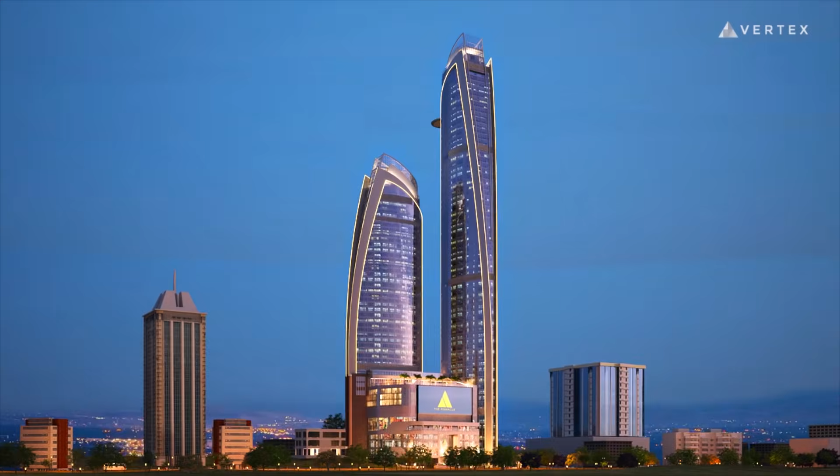In 2017, Kenya's president stood on a plot of land in Upper Hill and laid the foundation stone for what was supposed to become the tallest building in Africa: 320 meters, 70 floors, a 5-star Hilton on top.

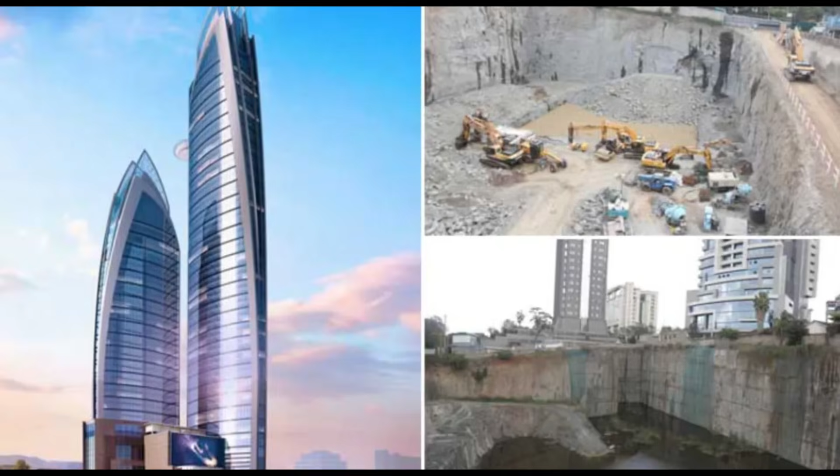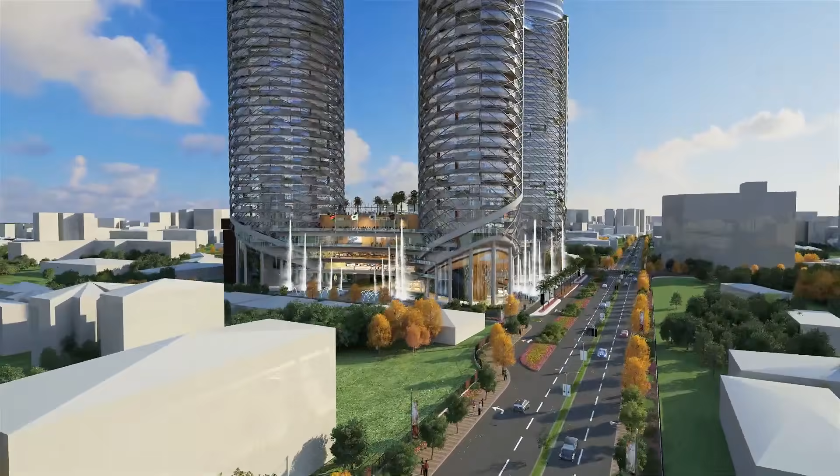Today, that plot doesn't have a tower on it. It had its land put up for auction. And it's not the only one. Kenya has announced at least 4 other skyscrapers just as ambitious, and every single one of them has stalled. This isn't a story about bad luck, it's a story about a pattern. And by the end of this video, there's one more tower, one actually under construction right now, that might finally break it.

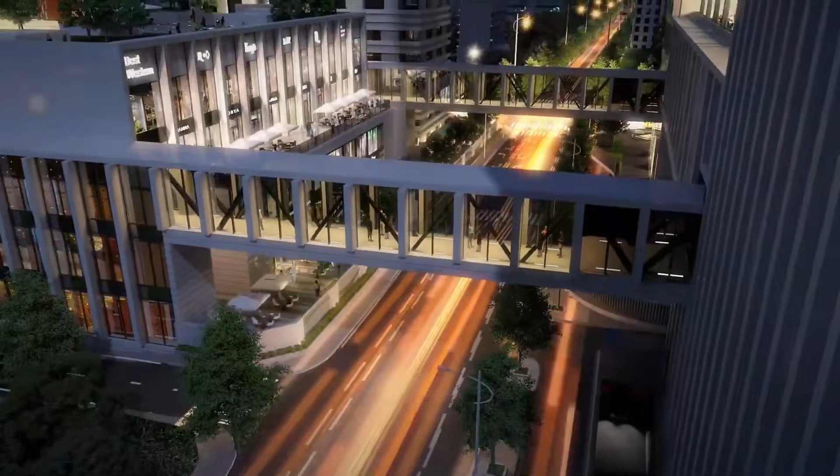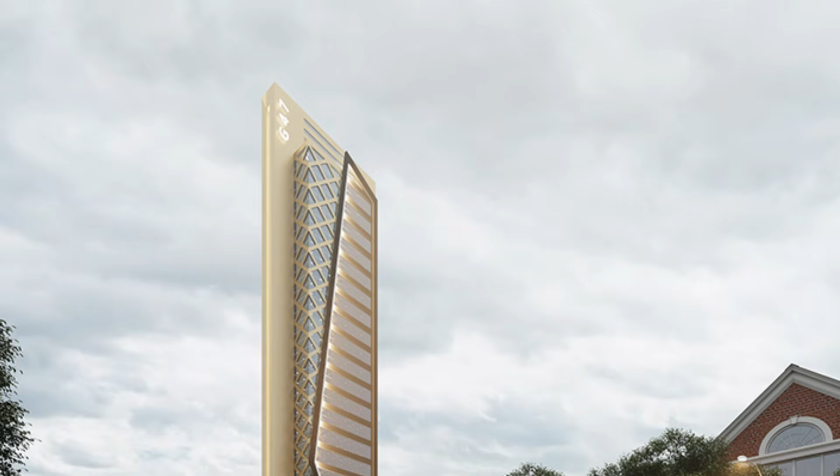Kenya doesn't have a shortage of ambitious skyscraper designs. Investors keep announcing them, presidents keep breaking ground on them, and renders keep circulating online. The hard part isn't dreaming these towers up, it's finishing them. Over the next 15 minutes, we are counting down 5 Kenyan skyscrapers that were announced with real money, real government backing, and real construction crews, starting with the quietest failure and building up to the one that has started with the most fanfare of all.

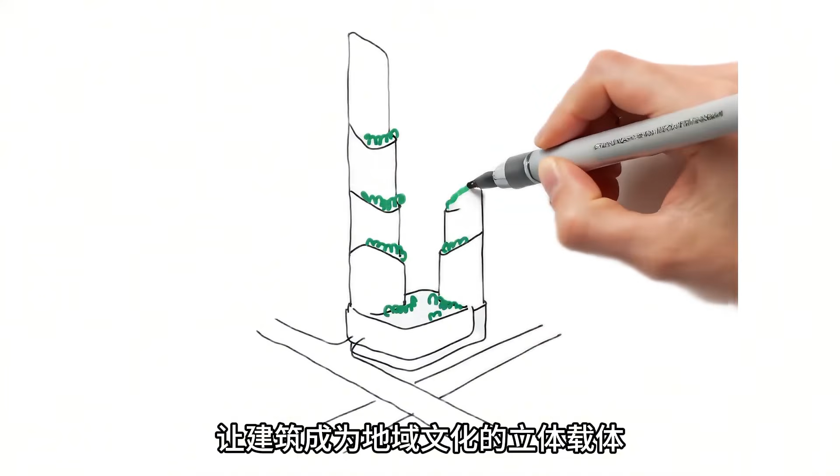And then, at the end, we look at a 6th tower that's currently under construction, one that Kenya's own pension fund says was designed specifically to avoid repeating this exact history.

Let's start at number 5: Montave Tower, another Upper Hill project announced around 2016. A 40-story mixed-use development, a joint venture involving Hass Consult and Abacus International, budgeted at roughly 5.56 billion shillings. Construction was expected to start in 2017. Nearly a decade later, Montave still isn't standing.

Property tracking data and local reporting describe the site as largely neglected, with minimal to no active structural progress since those early groundworks. It's not tied up in a dramatic court case, and it was not rejected outright by a regulator. It simply sat there year after year, quietly going nowhere, in a way that makes it the quietest version of this story. Not a collapse, not a scandal, just a stall that never really ended.

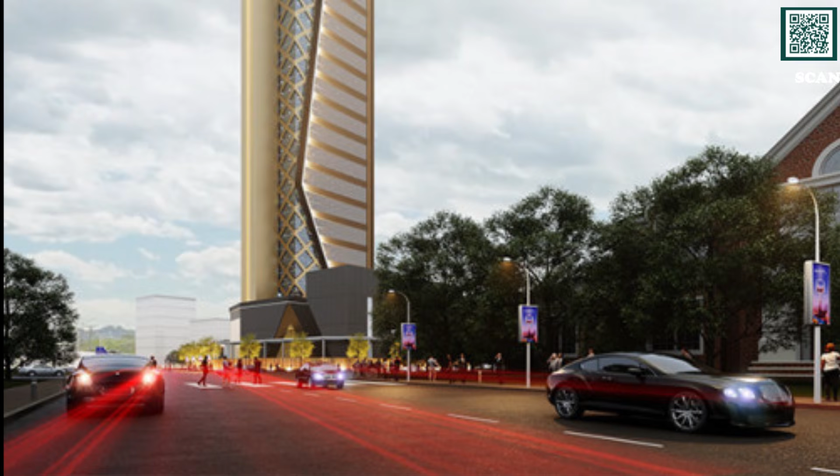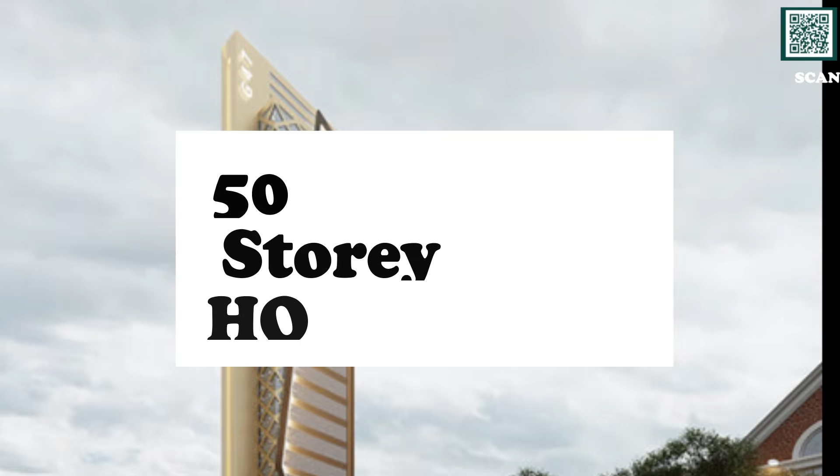Number 4 didn't die, it just got a lot smaller. G47 Ugatuzi Tower was announced as a 50-story headquarters for Kenya's Council of Governors, including a National Devolution Conference Center. Ground broke in December 2020 with then President Uhuru Kenyatta and Deputy President William Ruto both present. Budget around 5 billion shillings.

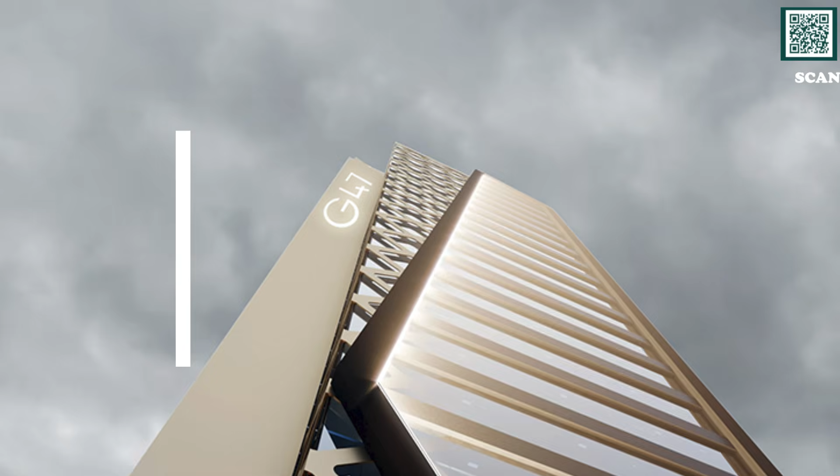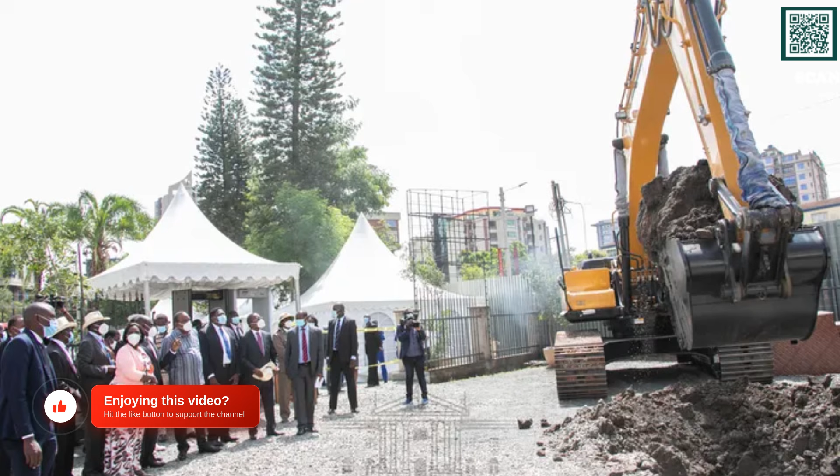But the funding source became controversial almost immediately. The project was being financed through a county workers' pension fund, LAPTRUST, and the county pension fund. And the workers' own union went to court, arguing they hadn't been properly consulted before their pension money was committed to a skyscraper. That case is a matter of public record through Kenya's own court system.

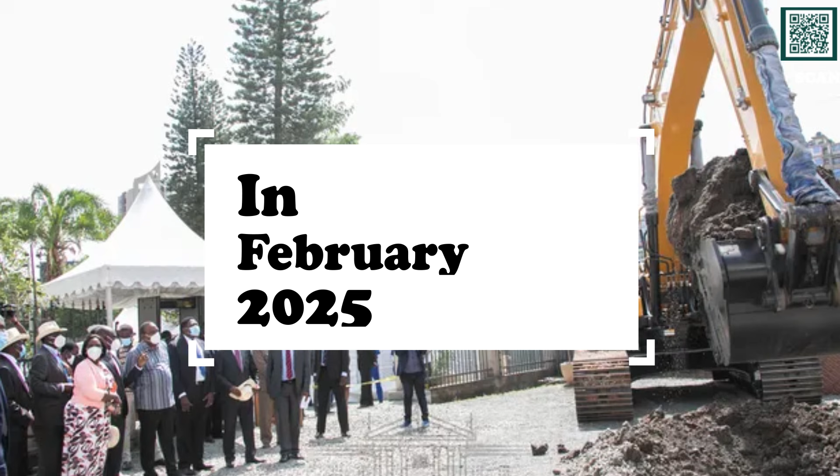In February 2025, Construction Kenya reported that the tower had been formally scaled back from 40 floors to 34. The official reason given was an oversupply of office space in Nairobi and rising construction costs. But industry reporting also suggested that pressure from the pension fund controversy played a role.

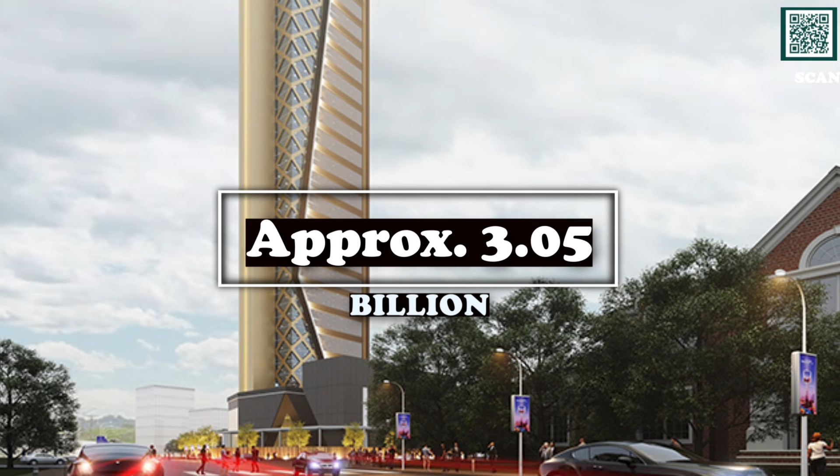And this isn't just a claim from a news article. There's an actual environmental impact assessment filed with NEMA for the revised 34-floor version of the building at a new estimated cost of about 3.05 billion shillings. That's a real, documented 15% size reduction on a project that already broke ground with two of Kenya's most senior politicians standing on site.

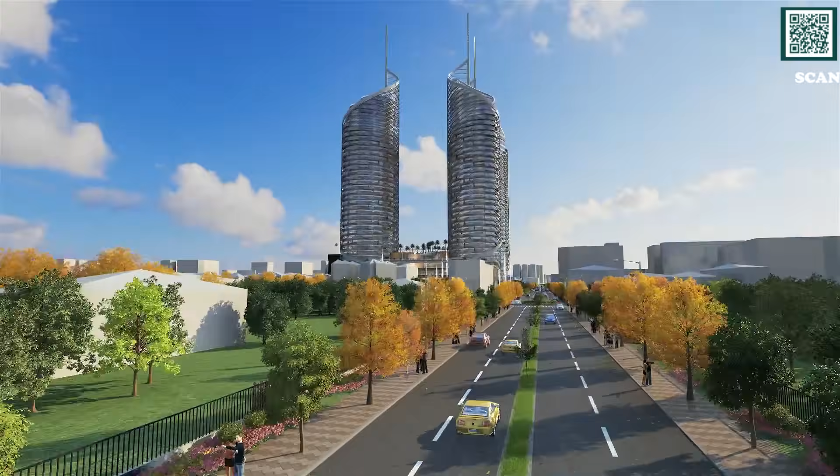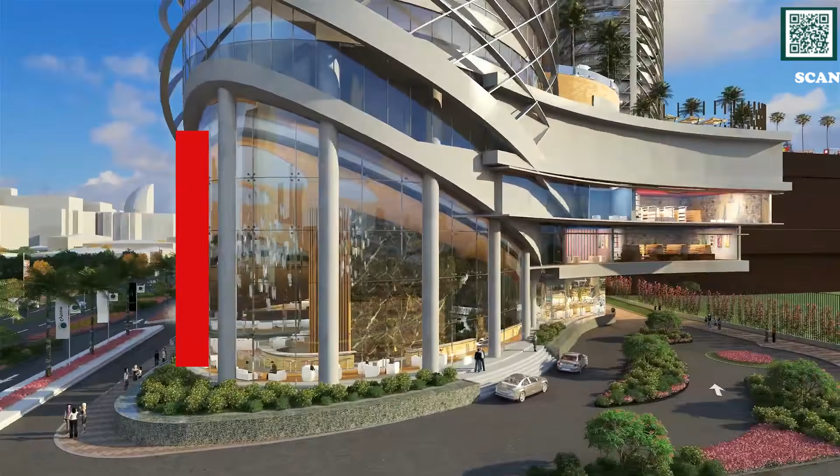Number 3 has a genuinely clean ending, which makes it a useful contrast to the two we have just covered. Cytonn Towers, 2 35-story buildings in Kilimani, 20 billion shillings, aimed at upper middle class residents, NGOs and diplomatic tenants. Nairobi City County approved the plan in July 2017.

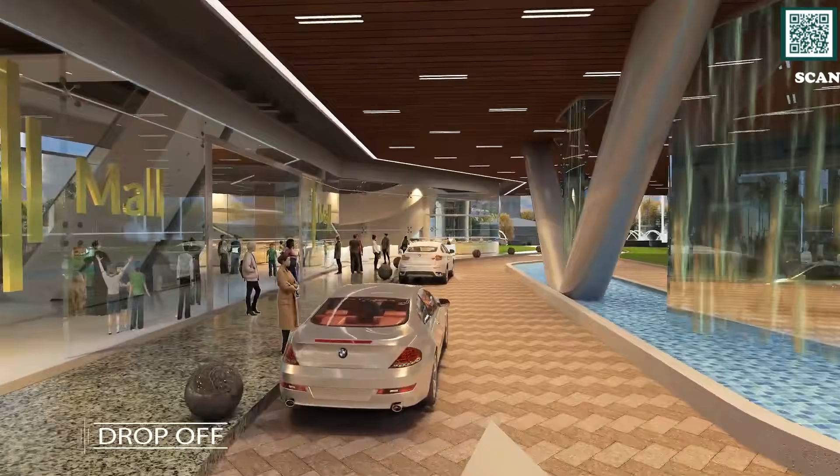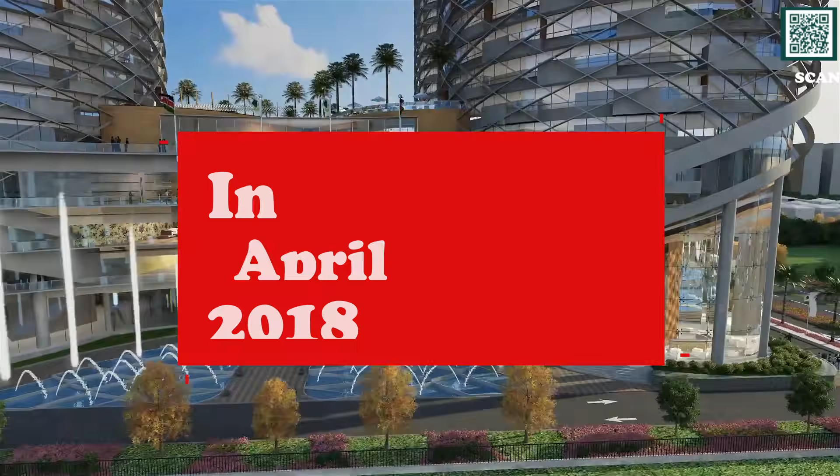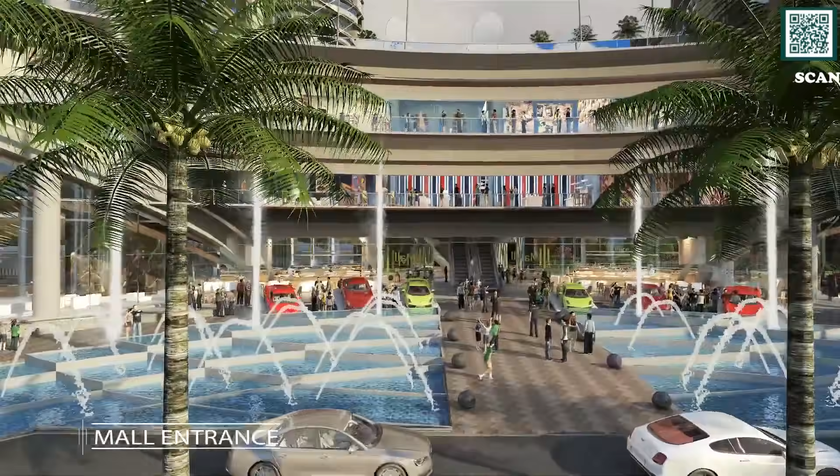Kilimani residents pushed back almost immediately. Traffic density and proximity to a nearby school were the main objections. And in April 2018, Nairobi County did something unusual: it cancelled its own prior approval. Cytonn sued to get that decision overturned. They lost. A High Court judge upheld the county's right to revoke an approval they had already granted, a ruling that's since been referenced as a precedent in other Kenyan development disputes.

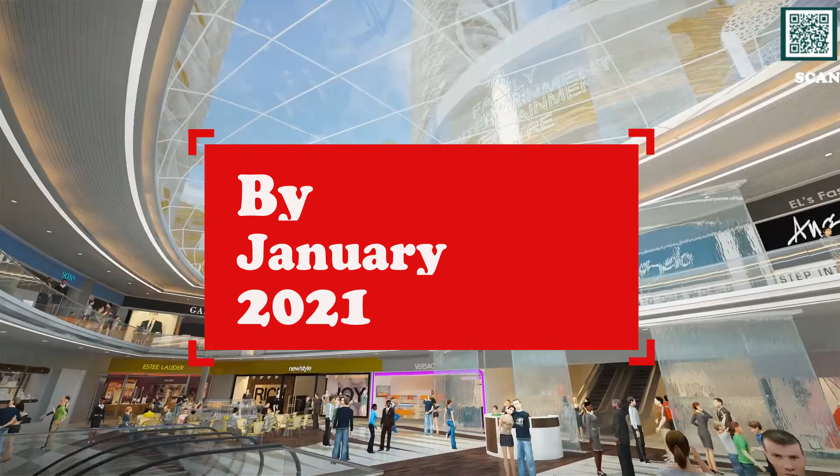By January 2021, Construction Kenya reported that Cytonn had shelved the project entirely and put the 4-acre plot up for sale, looking to raise around 2 billion shillings. Announcement, approval, opposition, cancellation, court challenge, defeat, and land sale. Of every project in this video, Cytonn Towers is the one we can say with full confidence is not coming back.

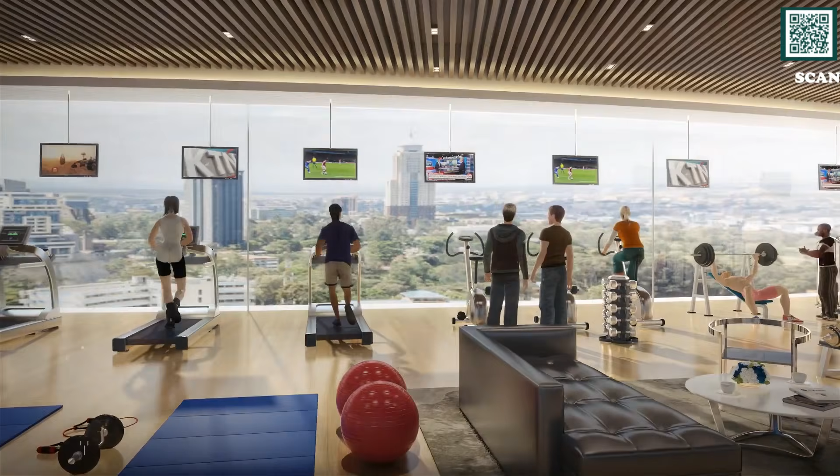Number 2 might be the most ambitious skyscraper ever proposed in Kenya, and is not even in Nairobi. Palm Exotica, proposed for the small coastal town of Watamu in Kilifi County, not Nairobi or Mombasa. 61 floors, 370 meters, a 5-star hotel with 270 rooms, a shopping mall, offices, apartments, even a casino.

Designed by Italian architect Lorenzo Pagnin, backed by Italian investor Franco Rosso alongside partners from New York and South Africa. Announced in 2018. In 2019, local leaders and residents publicly backed the project while Kenya's environmental regulator NEMA was still reviewing it. But here is the part most online write-ups about this tower leave out.

In January 2020, NEMA declined to issue the environmental license for the project as it was designed. Kenyan reporting at the time said NEMA cited concerns about zoning, physical planning, and the coastal foreshore, and told the developers to either redesign the project or find an alternative site entirely.

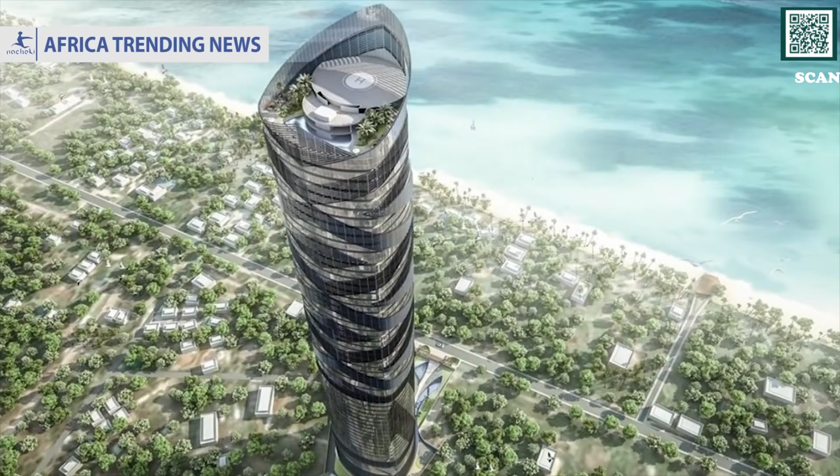Unlike Cytonn's court battle, this wasn't a community fight or a legal dispute. This was Kenya's own environmental authority looking at a super tall skyscraper on a sensitive stretch of coastline and saying, 'Not like this.' As of the most recent reporting available, the project is still described as being in limbo.

There is even an academic paper from 2022 examining the environmental and social impact assessment. So this wasn't just an internet rumor, it was a real proposal that went through real regulatory review and got turned away. 8 years after it was announced, Watamu's skyline is exactly as it was before anyone had heard the name Palm Exotica.

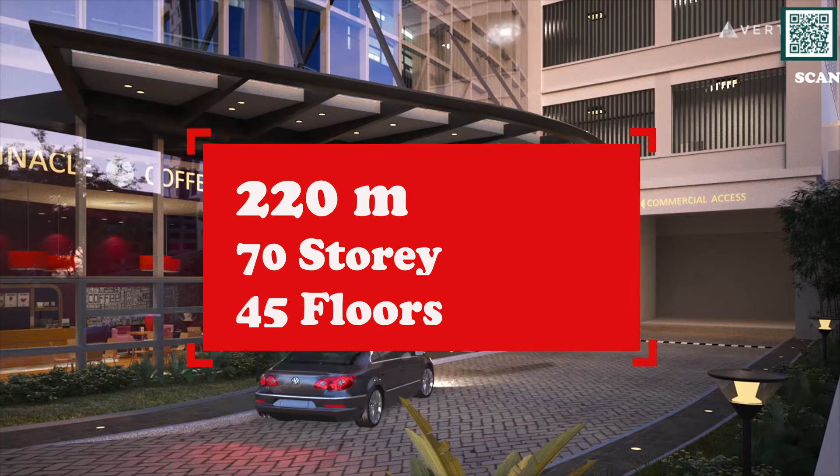And that brings us to number 1, the story that opened this video. The Pinnacle, sometimes called Pinnacle Towers, 2 adjacent buildings in Upper Hill, a 220-meter, 70-story tower, paired with a shorter 45-floor sister tower that was going to house a 255-room Hilton Hotel.

On May 23, 2017, President Uhuru Kenyatta laid the foundation stone himself. This wasn't a quiet private development. It was a national statement.

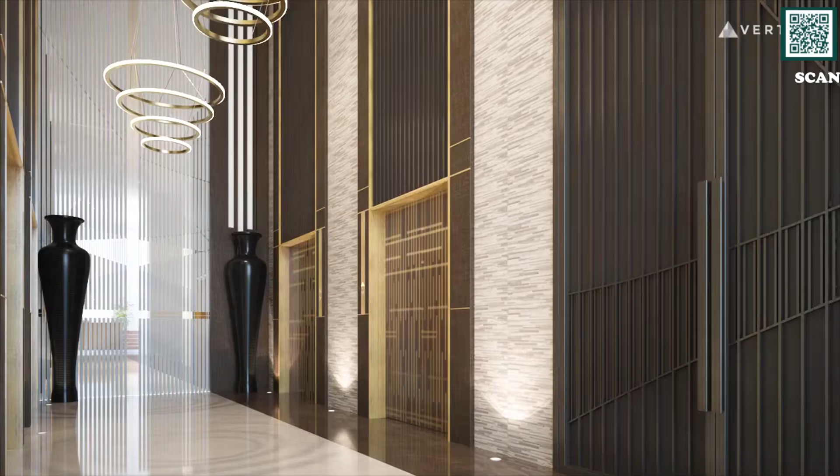The developers were Hass Petroleum and the White Lotus Group, led by Indian businessman Vijay Kumar Naidu. Construction actually started. For a while, this looked real. Then the legal problems started.

Part of the land the project needed became entangled in a dispute involving a Ugandan businessman and a trust connected to the family of a former UAE ruler.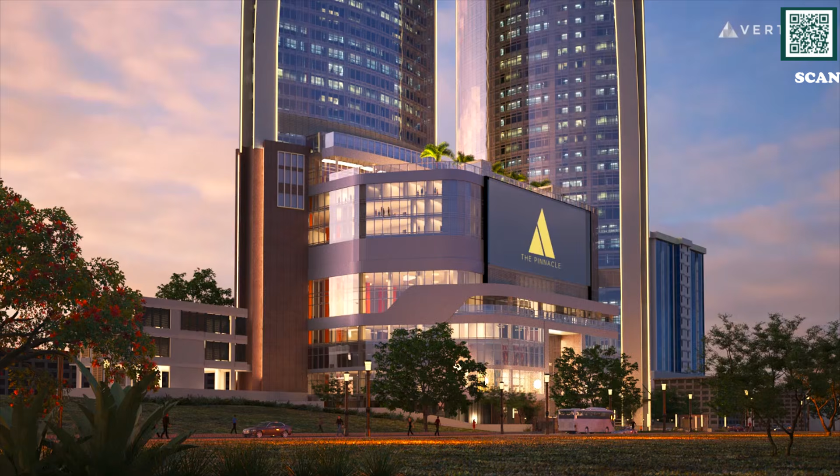In January 2021, a Kenyan court ordered the developer, White Lotus Projects, to pay a scaffolding supplier roughly 197 million shillings over unpaid debts. By 2024, Business Daily was reporting that the company behind the project, Jabavu Village, was facing multiple lawsuits over debts and contractual disputes tied to the site.

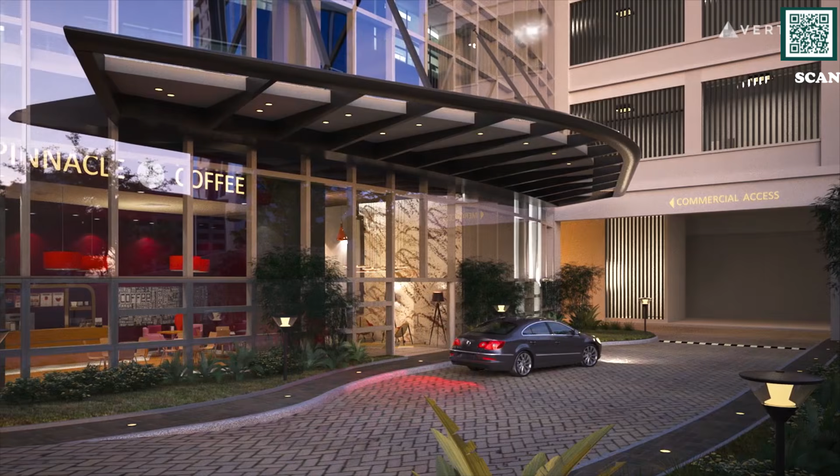Then in February 2025, the land itself, the plot the tower was supposed to sit on, was put up for public auction as part of a roughly 1.2 billion shillings loan dispute with the bank. There was also a court injunction filed around the same auction attempt, so even the sale itself became contested.

What we can say clearly is this: the project has remained stalled for years, despite the developers periodically signaling they hope to revive or redesign it. As of now, there is no completed Pinnacle Tower, just a stalled site, a legal paper trail, and a plot of land whose ownership is still being fought over.

Of everything on this list, this is the one that started with the most fanfare and fell the farthest. If you have driven past the Upper Hill side and seen it in person, tell me what it actually looks like right now. I want to know if it's changed.

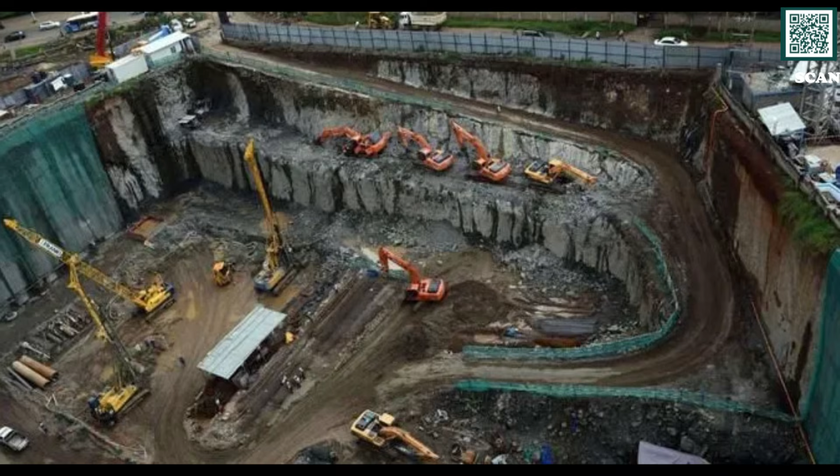Look at these 5 confirmed cases side by side and a pattern emerges. Pinnacle stalled over land ownership and financing. Palm Exotica was stopped by Kenya's own environmental regulator. Cytonn was killed by community opposition and a county planning reversal. G47 survived, but only after a pension fund governance fight forced it to shrink by nearly half.

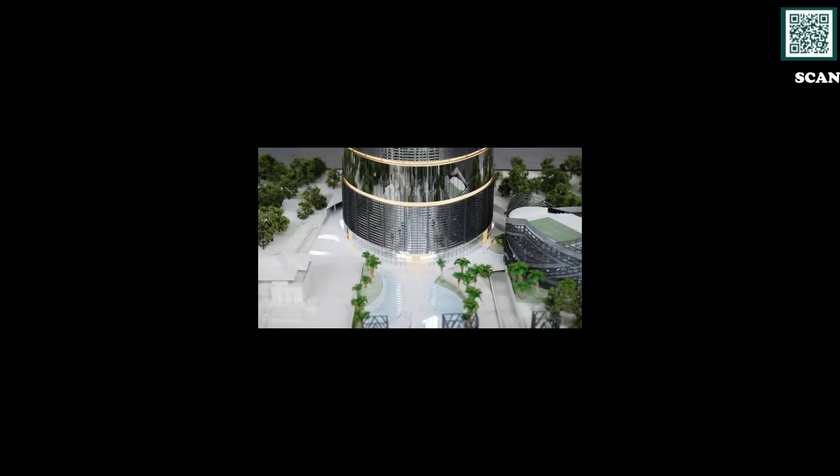And Montave simply stalled quietly with no dramatic cause on record at all. 5 different projects, 5 different failure points: land, regulation, community, governance, and in Montave's case, apparently nothing more than momentum running out. The one thing they don't have in common is lack of ambition. Kenya's investors and government agencies keep dreaming at a super tall scale. The bottleneck is not imagination, it's execution.

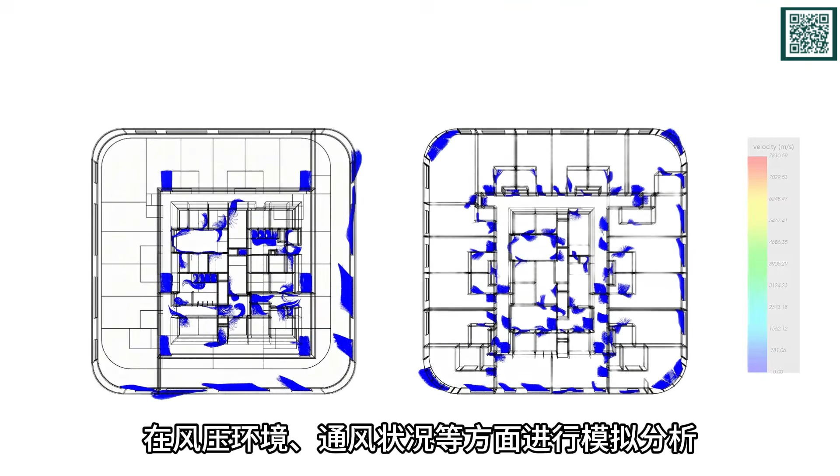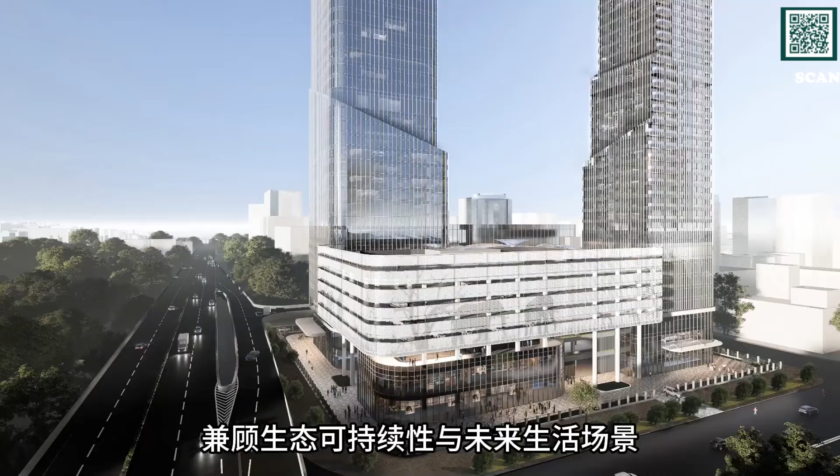Tower A, 60 stories, 260 meters, which would make it the tallest building in East and Central Africa. Tower B, 35 stories, 140 meters, a 30 billion shillings project, fully funded by the pension fund itself.

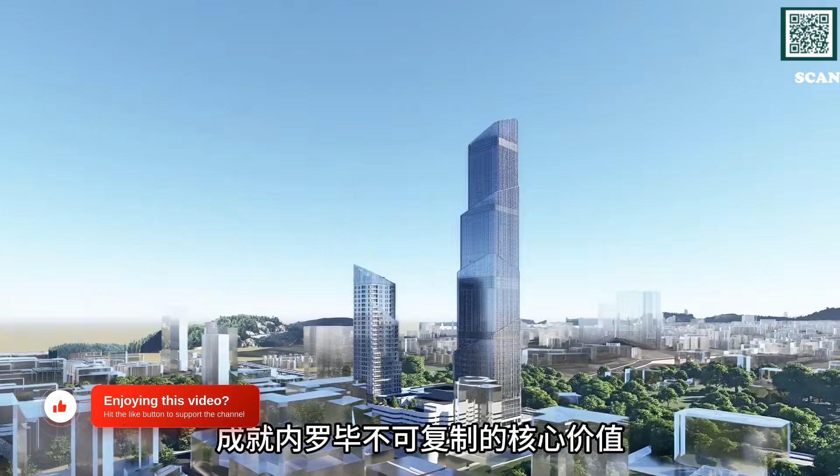This isn't rumors or renders. NEMA's public participation process was formally published in the Kenya Gazette in February 2026. And unlike Palm Exotica or Pinnacle, this project actually got past that stage.

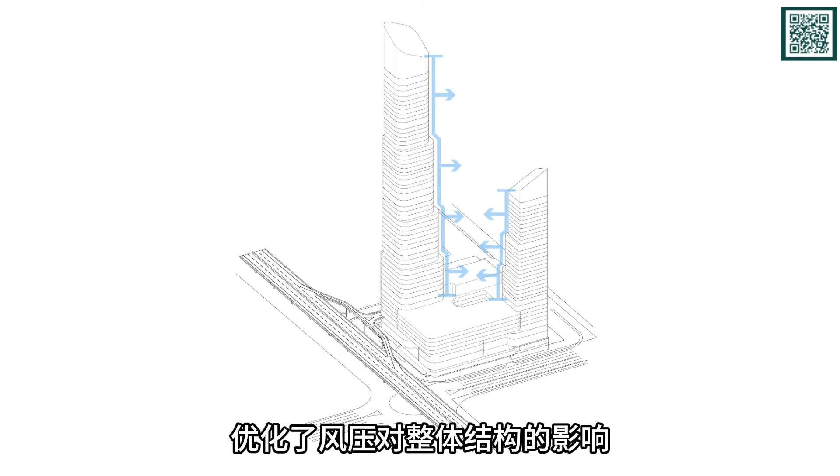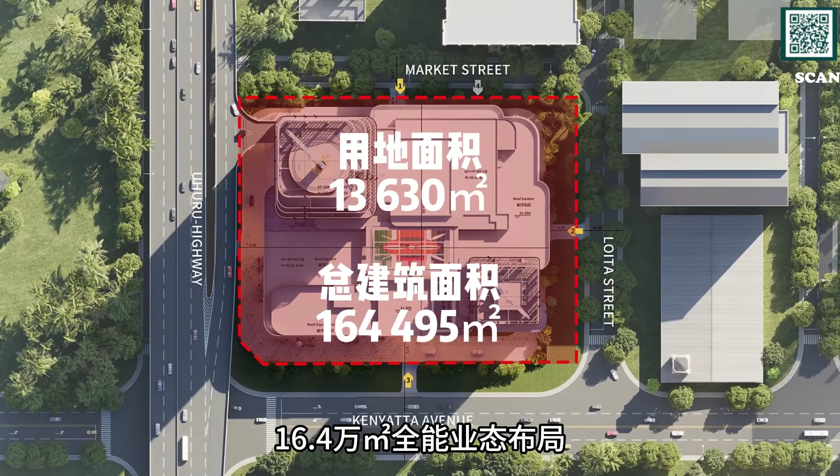NSSF broke ground in early 2026, and as of now, the site is an active groundwork and excavation. Paperwork is done and diggers are actually on site. A contractor has already been named, China Road and Bridge Corporation, working alongside CCCC, that highway engineering.

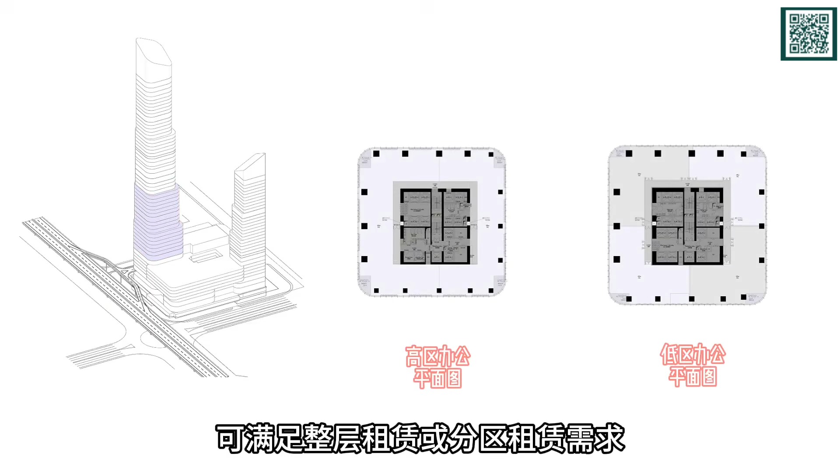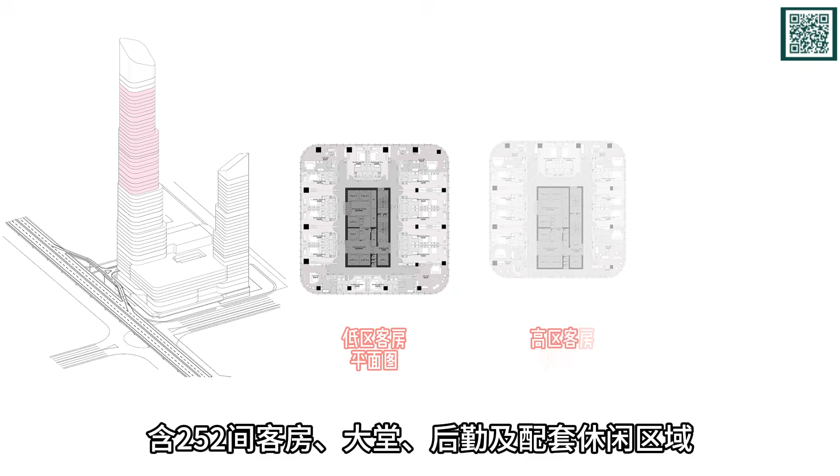And here's the detail that ties this entire video together. When NSSF's CEO briefed Parliament on this project, it specifically said the fund adopted a different financing structure. The contractor finances construction and NSSF pays out against verified milestones, explicitly to reduce the risk of contractors taking mobilization money and then failing to deliver.

In other words, Kenya's own pension fund is telling Parliament on the record that it has learned something from Pinnacle, Palm Exotica, Cytonn, G47 and Montave, and knows the pattern. Excavation is underway. Whether that's enough to actually get a tower built where 5 others couldn't is still an open question. But for now, at least, this is the one project on this list that's moving instead of stalling.

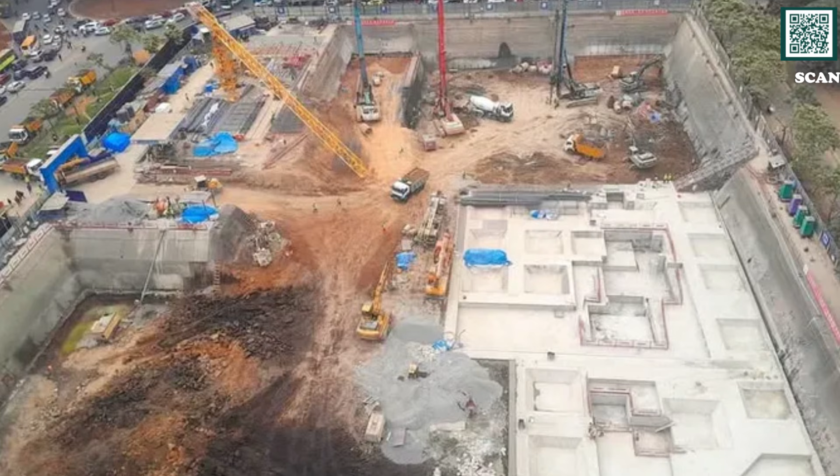5 ambitious Kenyan skyscrapers that never became what they promised, and 1 massive new tower currently under construction, built by an institution that says it's specifically designed to avoid this exact history.